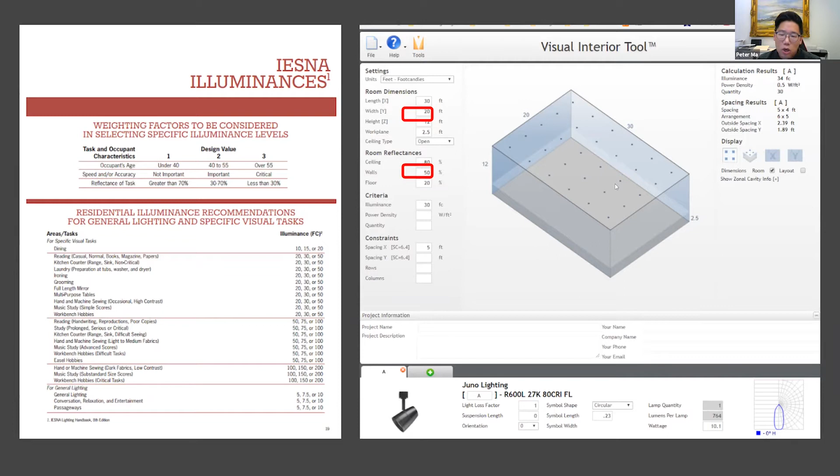Okay, so we don't know what's going on, what's gonna be happening in the space. So we call it general illuminance. Okay, and so this is how we will light it up: we will light up based on the subject and what's gonna be displayed, and then we'll pinpoint individually.

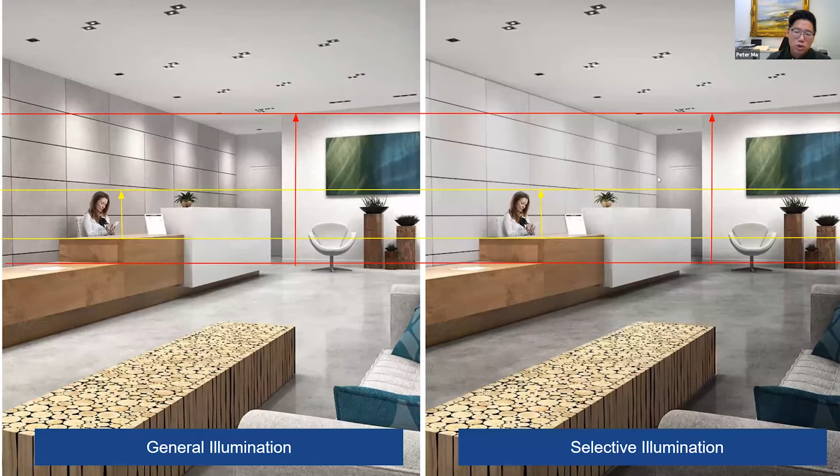Okay. And here's, as you can see, the same photo, but this space just feels taller. So we use something we call a wall washer, so that we wash that entire wall. You don't see that scallop. You don't get the dark corner. So this is one of the strategic planning approaches we use quite often. We call it selective illuminance, and this one is just general illuminance. They don't plan ahead of time.

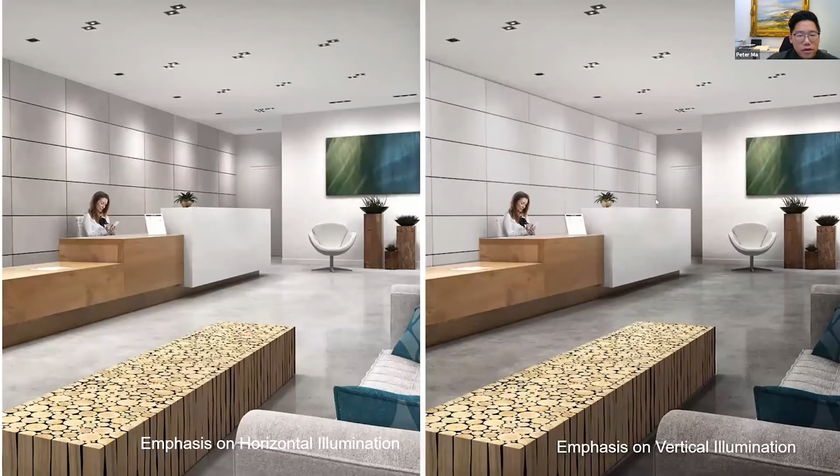Okay, and so in terms of the lighting design, we use some software called DIALux. Okay, so if, let's say, Peter gives me a CAD drawing, we will be able to create this rendering. As you can see here, this is an actual photo at the bottom, and this is a rendering at the top. We can pinpoint, we can predict what's going to be happening.

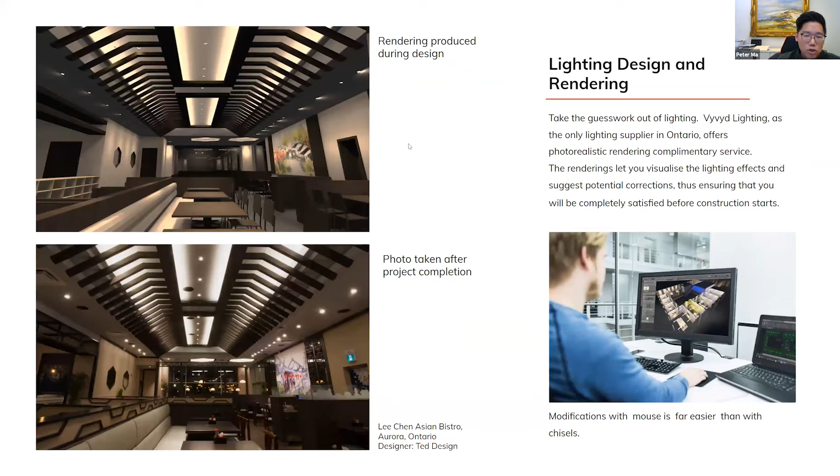Before this, the interior designer kind of had to guess what's going to be happening before they flip on the switch. Everything had to go through guesswork. But we are able to use the lighting software in order to visualize it. Okay, so we put light where it needs to be, not where it's not needed. So as you can see, we point the light source only on the rack, not at the background.

Okay, so typically an interior designer will provide us a CAD drawing and then maybe a SketchUp file. And so this is actually one of Peter's projects called Lee Chen Bistro. It's also in Toronto, Aurora.

With this lighting rendering, once we provided it, they actually made a pretty major decision. As you can see, on the original design there's a big chandelier here. But once we showed them the rendering, they said, oh, actually this ceiling is a very, very nice ceiling feature. Why do we want to cover up this nice ceiling feature? So they actually took the chandelier out and saved on the budget, and the space looks much cleaner and less cluttered.

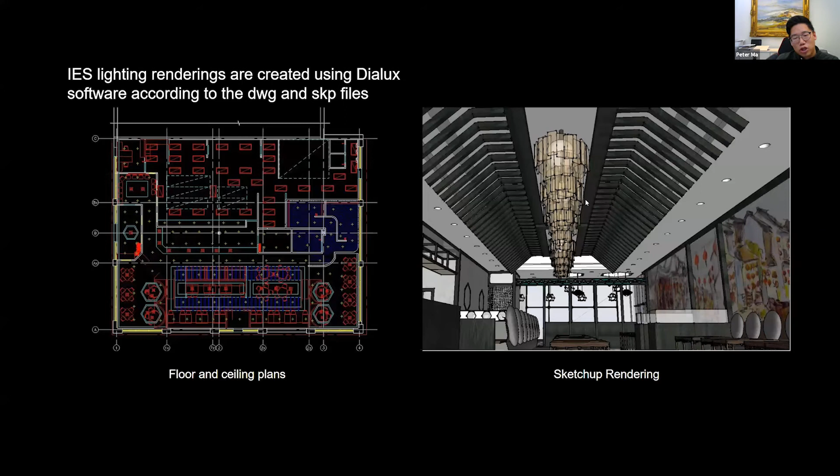As you can see this from another perspective. So removing this chandelier not only saved on the budget and design, it also saved the client money as well. Also some of the other ones. Okay, we work with the interior designer to plan out how to highlight this. Again, we can do it from the rendering and understand how we're gonna plan it ahead of time.

Okay, so what's the purpose? When we do lighting design, here are the main key things we have to think about before we plan ahead. First of all, we have to know what's the minimum requirement, what's the purpose of the area, right? Every space has its minimum light level requirement. So this will definitely be the basic level provided by the electrical engineer, the general illuminance. These are the building codes we have to meet, okay?

And then second of all, we have to provide the perception of space. As you can see from my previous example, this space is more three-dimensional. As you can see here, we're using the same idea of light and dark. We have light and dark and light. So it shows more depth here through the lighting.

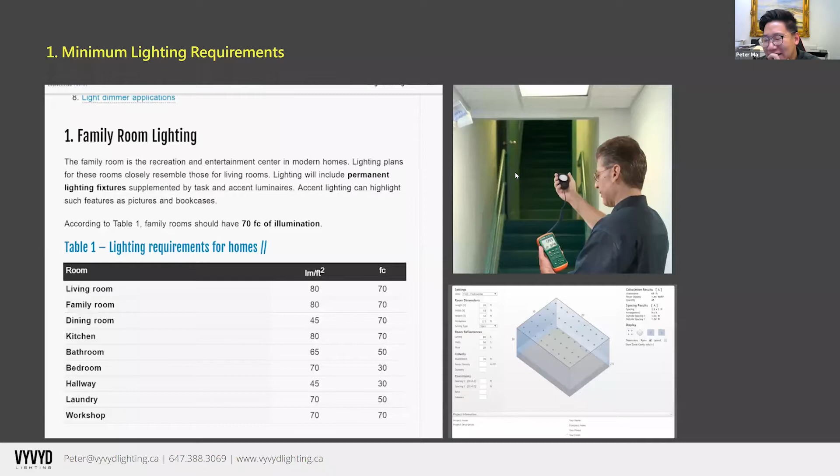So far so good? I feel I'm going a little bit fast. Any questions so far? You want to review a little bit? I feel I'm going too fast here. What I didn't get was the last screen, the 25%. Okay. Can you elaborate on this one a little bit more?

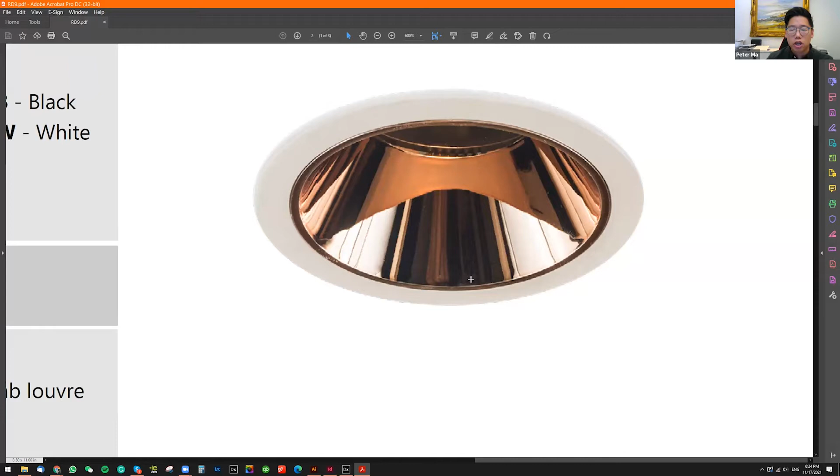Yes. So as you can see here, there are two types of light source. If you look here, this type we call a deep baffle light. Let me show you an example. Let me pull up the spec sheet here. So as you can see, this light source is very, very deep. And then there's a baffle around it. So it eliminates the glare. The light source is very well hidden inside.

I don't know if you've seen them, if you go to Home Depot or any sort of electrical supply store, with these lights, as you can see, the light source is on the surface, and they're not deep recessed. And these are the lights that will give you the glare. So when you choose your light source, make sure to take that into consideration. When the light source is on the surface level, these are the glare you will see.

Good, thank you. Now I understand. Now it's clear. Okay. Yeah.

And so speaking about choosing the fixture, we have to classify two types of lighting. We call it decorative lighting and architectural lighting. So decorative lighting, think about it as a jewelry piece. As a woman, you want to put on a nice necklace or a jewelry that you want to showcase.

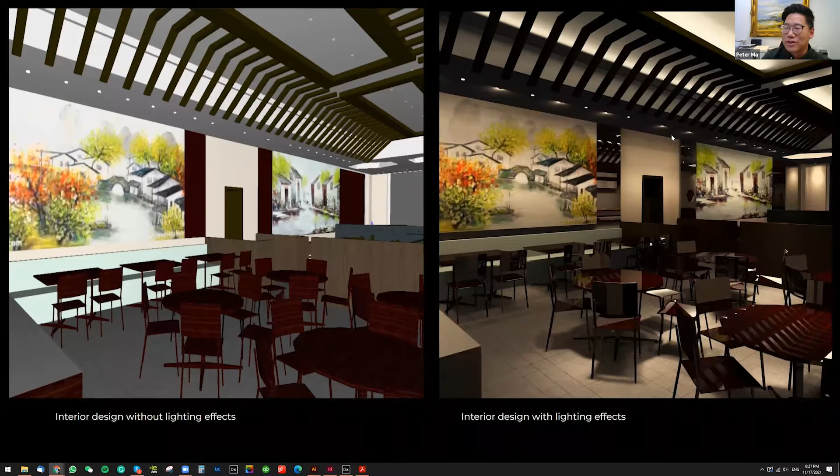It's a little bit of a harder concept to get, but when we light up the space, our lighting will show the contour, and you can show the lines of the object. So it's kind of like when you put on your makeup, your face is more three-dimensional. Again, all the beam shapes are kind of like your brushes, right? I think females will get this a little bit better. With all these brushes, it will help you shoot the light on your subject.

For example, we have this wall washer, which is kind of like your foundation. You want to light up this entire wall nice and even. And if you have a bad wall washer, the wall is not evenly lit. It's not as soft.

And with the spotlight, you have to look at what kind of beam shape to shoot on the subject. As you can see here, we have this screen. We're going to choose a certain beam angle and calculate it to shoot on the subject. And not all beam qualities are the same. These are a comparison of different vendors. We have a spot that's nicely softened out, and some where you can see this big scallop. So when you choose your lighting spec, not everybody's are the same.

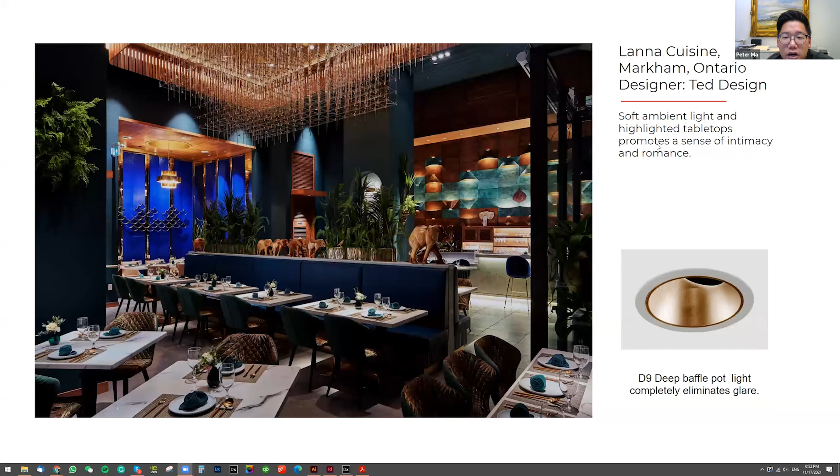Let me see, I might be able to find a video for it. Let me see.

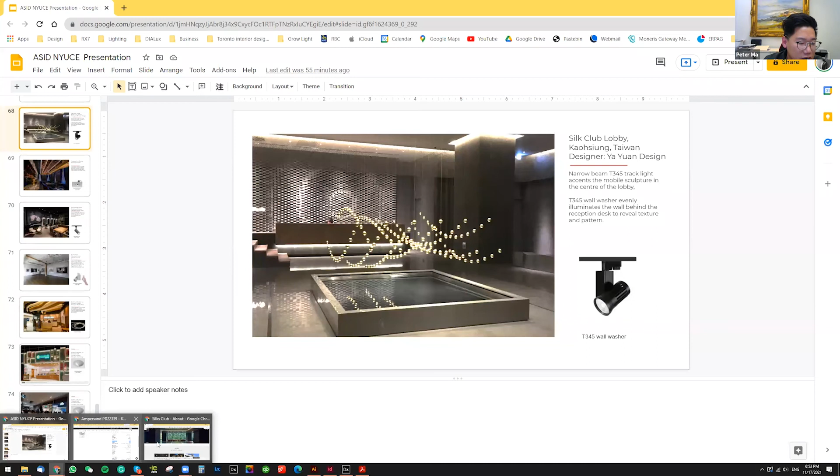Now the wall washer gets rid of the spotlights on the wall, but does it actually do anything for lighting the room beyond the wall? Absolutely. We're trying - let me go back to this image here. Let me see if I have a better photo. Because if you see here, when you light up the wall, it actually gives a sense that it's brighter than lighting up the floor.

Let me go down - where'd I go? Okay, let's just look at this photo here. When we light up the whole wall, it gives it visual brightness, but in numbers, if we calculate based on engineering, it's not really bright because the middle floor area is all dark. But at the same time, we light up where it needs to be. That's what I'm trying to say - we have to light up where it needs to be, not just on the empty floor.

So you control the spillage of the light to make a focal point. Exactly. If you see here, this is how we execute it - we hide these light sources and shine it in the center, where the globe is.

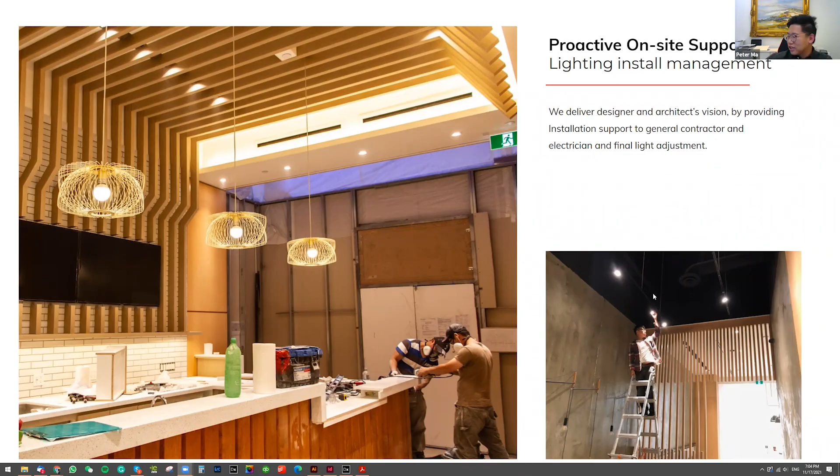I know I touched very briefly on everything, it's very general, but feel free to contact me if you'd like to become a lighting designer.

There's a free software you can play around with, a completely free lighting rendering software. This is the software we used to create this very nice rendering. As you can see, there's a photo and there's a rendering.

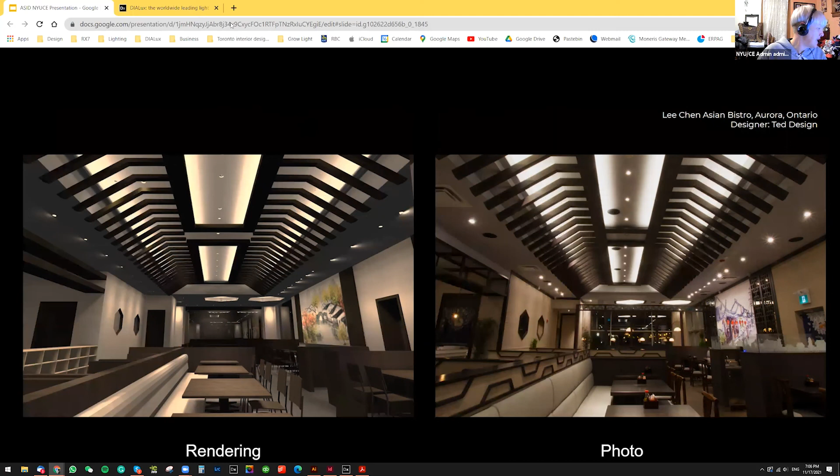Moving a chisel is more expensive than moving a mouse, right? So yeah, this is our technique. That's amazing.